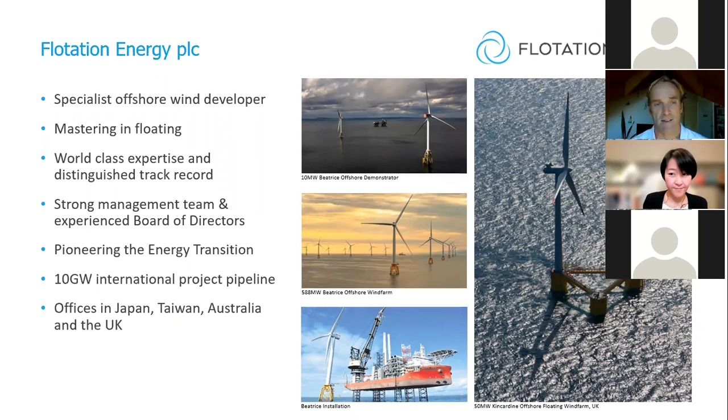Flotation Energy developed the Kincardine offshore floating wind project - or the directors of Flotation Energy did, and the rest of the team were involved in developing that project and getting the consents and bringing it to the construction phase, which is where it is now. That was first started by Allan MacAskill and Nicol Stephen, and they subsequently brought Cobra in as a joint venture partner, who are part of the ACS group, a Spanish engineering, procurement and construction company. Combined, they've now brought that to the construction stage.

The photo you see before you is of one of the 9.5 megawatt floating turbines being towed to the site off Scotland. It's about 15 kilometers offshore in 60 to 80 meters of water. The total capacity of the project is 50 megawatts, which makes it the world's largest floating offshore wind farm and is likely to be the largest grid-connected floating offshore wind farm potentially through 2025-26.

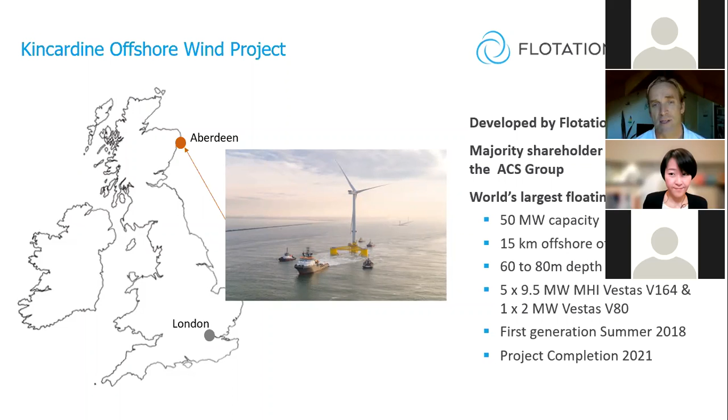There are 5 9.5 megawatt MHI Vestas machines and 1 2 megawatt machine. The 2 megawatt machine was installed in summer 2018 and has been generating since, and is now in port for refurbishment. There are 2 9.5 megawatt floating machines on site at Kincardine now.

The other 3 machines are in assembly and will be installed by June this year when the project is fully complete and operational. That's a hugely exciting project, led by the Flotation Energy team, and represents the culmination of a lot of knowledge around floating offshore wind, giving us lessons learned for the next project, including in Japan. We're keen to bring that experience and our bottom fixed wind experience into Japan and work with our partners there.

Flotation Energy has 3 areas of business: UK leasing rounds, which is round 4 that has just concluded, covering England and Wales bottom fixed offshore wind farms, and ScotWind, which is primarily focused on commercial floating. The second area is oil and gas decarbonisation, the energy transition as we call it, with a number of projects going on in the UK and internationally.

We see an opportunity in Japan for oil and gas businesses wanting to get into offshore wind, working with Flotation to develop those projects, and leveraging all that UK experience and exporting it abroad. So we have a number of international projects in development, which is what I lead, including in Japan, where we now have offices and personnel, Taiwan with Reggie Wu, who I believe is on the call, Australia, where I am based, and in Ireland and Norway as well.

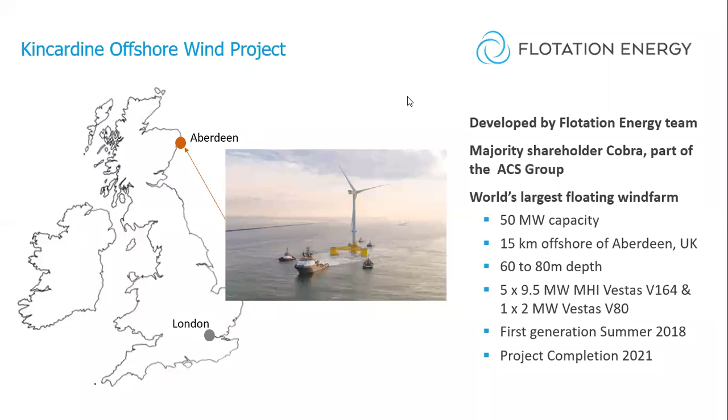Can we just go down 2 slides, please? Thank you. And then you see Total on the other side of the UK and RWE as winners as well. Very exciting project for us to be winning, and combined with Kincardine, it really brings together all the expertise we have in both bottom fixed and floating.

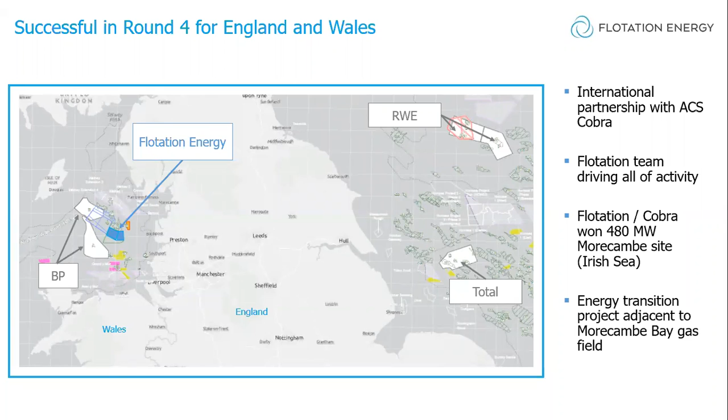So I've given you a sense of what we do. In addition to all of that, we have a major 300 megawatt floating wind project in the UK that we're working with a large international oil and gas company on developing, and I hope to be able to give you some more news on that now.

We have Nobu Suzuki, who represents the company in Japan. We've done a lot of work identifying sites and potential projects. We bring a unique experience and track record from the UK into Japan and throughout Asia. Our business model is very much a collaborative and partnership-based approach. We believe project development is a domestic, local business - you can't do that from outside Japan.

So we're looking for partners to help us develop those projects, those who want to be part of floating offshore wind, and we're ready to receive you, to talk to you. We're active in UK leasing rounds, as I've just outlined - we've been awarded a 480 megawatt offshore wind project in the Irish Sea, and we're bidding on ScotWind, again floating wind projects. We are pioneering the energy transition with the first 300 megawatt floating energy project, which we hope to announce very soon in the North Sea, building on the Kincardine project.

And we're developing projects in Europe, Australia, Taiwan, and indeed Japan. So with a lot of expertise, a lot of knowledge, we're very keen on developing floating offshore wind in Japan earlier, and we believe that's really important. Floating wind is at a relatively early stage. There's maybe 74 megawatts of installed capacity worldwide. Huge potential, gigawatt potential. We believe Japan is really well placed for floating, and we'd like to see projects developing much earlier, so we can bring those forward and provide all those benefits, industrial benefits, jobs to Japan, and indeed to create an export market as well.

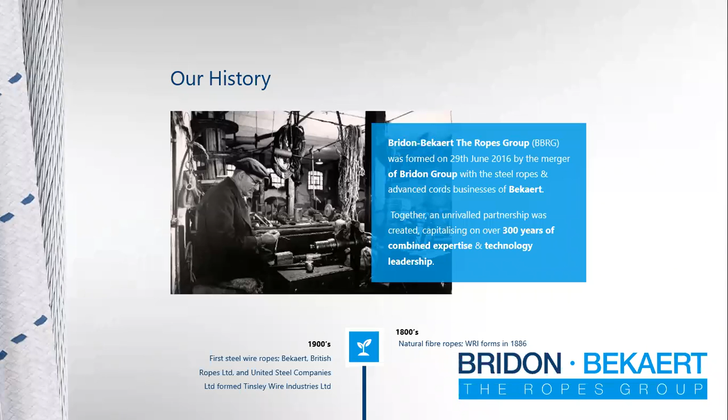BBRG was formed out of a merger in 2016 between the Bridon Group and Bekaert. The Bridon Group being a long-lived British rope company specializing in both steel wire as well as fiber ropes, and the Bekaert Group, which is a Belgian conglomerate of primarily wire products. Both companies began producing in the late 1800s, and we're producing steel wire ropes by the early 1900s. So we've been at this for a while with over 300 years of combined expertise in our respective industries.

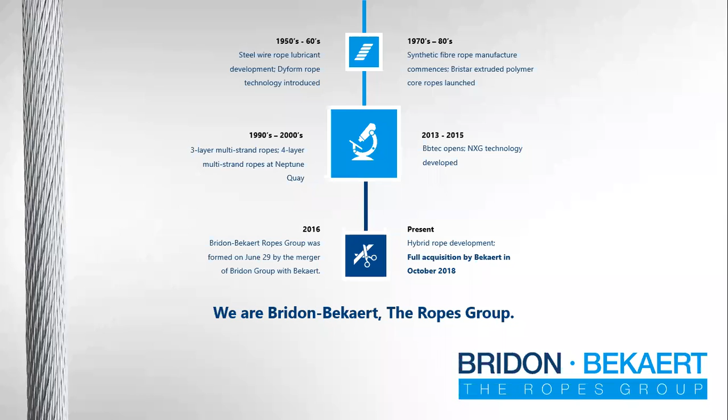As the companies grew, they've both been on the leading edge in terms of product development with a number of innovations such as Dyform steel wire ropes, Bristar wire rope with extruded polymer cores, etc. And this was done by heavy investment in R&D, and for example, in 2013, opening up our Bbtec Center specifically to develop next generation rope technology here in the UK. Currently, as an example of that, we have ongoing developments in hybrid rope technology. So basically taking our two expertises, which is synthetic fiber ropes and steel wire ropes, and trying to create combinations thereof, offering the benefits of both steel and synthetic.

So as part of Bekaert, Bridon is about 10% of the Bekaert Group. The Bekaert Group itself is a very, very well-funded, globally dominant player in the wire business. 5 billion euros in sales, 120 countries we have footprint in with over 30,000 employees. So BBRG is a capable partner, well funded to be able to deliver on large capital projects on time.

We do this through a global presence with offices, with production facilities, and with technical centers spread among all continents with the exception of Africa and Antarctica at this time. So 20 sales offices, 17 production plants, and 4 modern technology centers. So in all key markets of floating wind, whether we're looking at Japan, the UK, Spain, Norway, we have in-house engineering to support your project needs, as well as production capability. And being part of such a large experienced team, we're also ready to be able to establish new production facilities as needed.

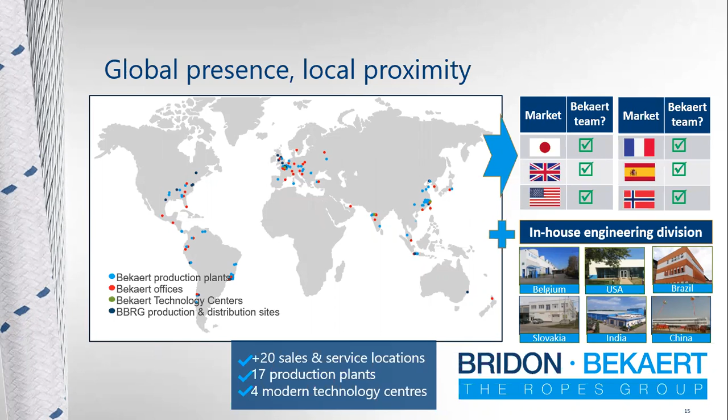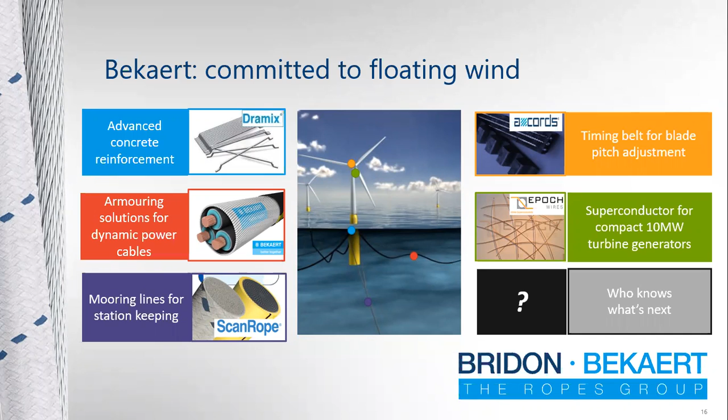Bekaert on a whole is committed to floating wind, not just with regards to mooring lines, which I'll be discussing further, but with regards to a number of other products within our company portfolio. So we have advanced concrete reinforcement with our Dramix product. We have low loss cable armoring from Bekaert Solutions. We produce cords, reinforcing cords for tires and belts, for example, used for adjusting the pitch on rotor blades. And we have a JV with Epoch Wires, developing a superconducting wire.

As I mentioned, this is done through a commitment to innovation. In our multiple R&D centers, we've committed to spending over 65 million euro in-house R&D per annum to be able to stay on the forefront and develop the next generation of products capable of enabling the green energy transition.

Specifically with regards to ropes and cables, we have a center in England called Bbtec, which is one of the most advanced full-scale testing facilities in the world for testing of synthetic fiber ropes, hybrid ropes, and steel wire ropes. We have a range of instruments and test machines specifically targeted at looking at wear modes of ropes in use. We have forensic laboratories to determine cause of failure, and over 25 technologists working specifically in the advancement of rope technology.

With regards to our mooring line production, currently this all takes place in the UK. We have 3 facilities dedicated to mooring line production. 2 of them are fiber rope production facilities, both based in Scotland. One, in Coatbridge near Glasgow, is our flagship facility for fiber rope production.

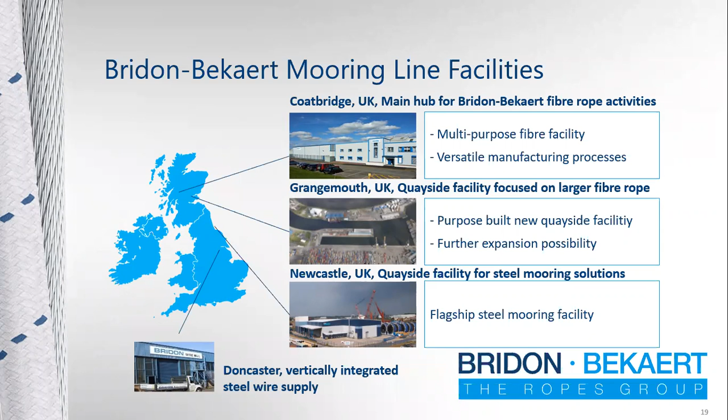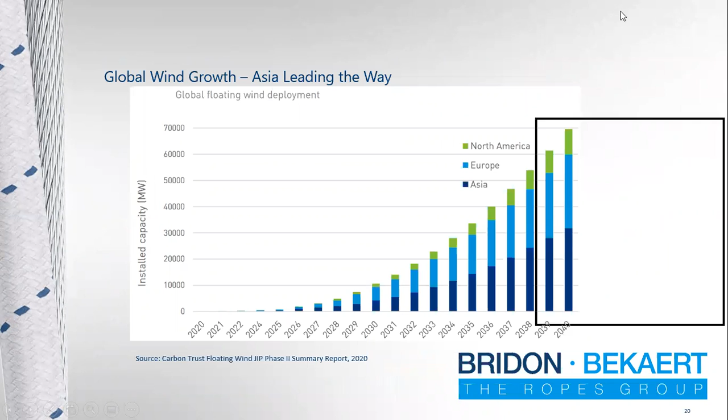So we are well positioned currently to produce mooring lines to meet the needs of the European market, as well as export needs to places like Japan. But as I mentioned earlier, we stand ready to grow and expand our facilities as needed, because the demand is growing in both Europe and Asia, as well as elsewhere in the world, hopefully. The ability for the supply chain to quickly respond to the needs of such large numbers of lines, as required as these farms go commercial, is going to be key to success, we believe.

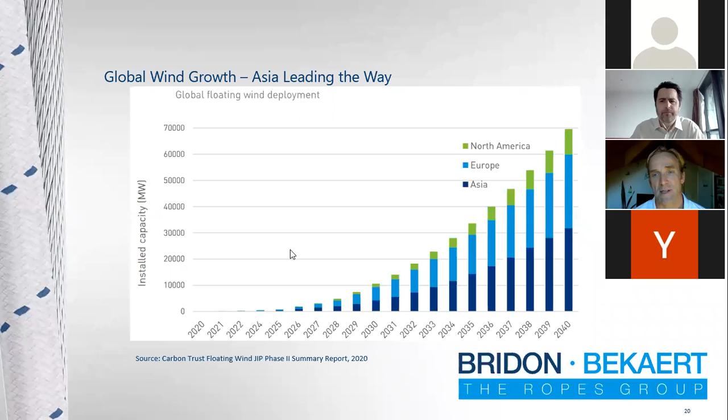In terms of track record, it's difficult to point to a long track record in floating offshore wind because it's rather new. But we can point to an unrivaled track record in deep water oil and gas mooring. If we look at the technological evolution leading towards floating offshore wind, it's natural to look at mooring for oil and gas. BBRG has a very long track record in providing station keeping mooring lines for oil and gas, with over 2,000 kilometers installed to date around the world, of both steel wire and fiber rope solutions.

This comes with a tradition of pushing the envelope with a number of firsts - first synthetic mooring lines, deepest spars moored in the Gulf of Mexico, et cetera. So leading the way in terms of mooring is something we're accustomed to doing, and we anticipate doing the same in floating wind.

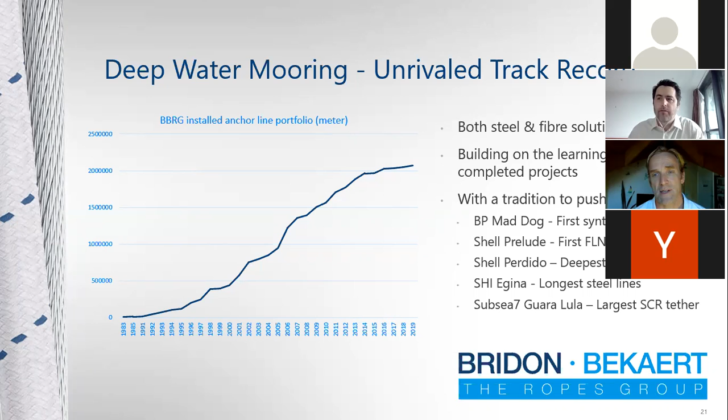And thus we have been active in pushing that envelope in floating wind as well, getting floaters in the water using our mooring lines. We currently have 2 floaters going into the water - one already in the water and one about to go in, utilizing our nylon mooring lines. One of them is the spar going in Goto Bay, Japan, with Toda Corporation. We also supplied steel spiral strand for Hywind Tampen in Norway, and nylon mooring line for the EnerOcean project off Spain.

So we're positioning ourselves well with regards to these demo projects to prove the viability of both synthetic and steel mooring lines, but particularly synthetic mooring lines, and our vision for what those should look like and how they differ from the mooring lines used in deep water oil and gas.

We're also advancing the technology through JIPs. We've been a member of a number of key JIPs responsible for characterizing and proving the validity of these new designs as safe and economical at farm scale.

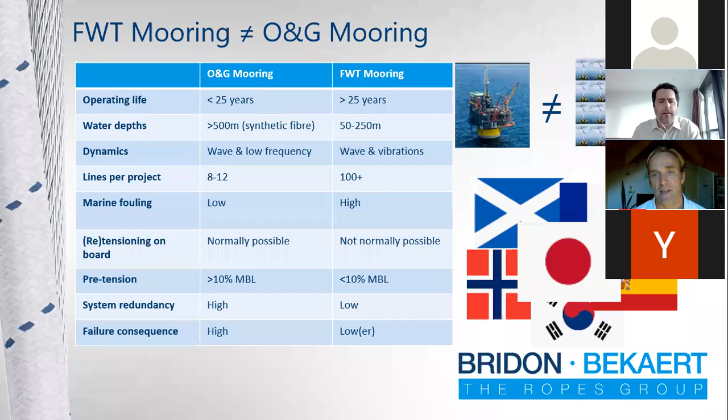In terms of our current offerings of mooring lines, we offer the gamut from steel spiral through polyester, nylon, and high modulus synthetics. Of the products currently being used in mooring, the only thing we do not offer is chain. One important note when we look at ropes is that the material selection available in rope means we have a very wide range of physical properties, which perhaps isn't necessarily appreciated when one is looking at one grade of steel or another.

If we compare across the range, for example in terms of elongation at failure, we have a tenfold difference from the elongation of steel spiral strand or high modulus synthetic all the way out to a nylon rope, where a typical nylon rope might achieve 20% or more elongation, polyester about 10%, and the high modulus synthetics and steels down in the 2 to 3% range. So simply in the amount of elastic compliance one of these lines can put into the system, you have huge leverage in your design just by choice of the correct mooring line. They also have different behaviors in terms of fatigue, strength, density, etc.

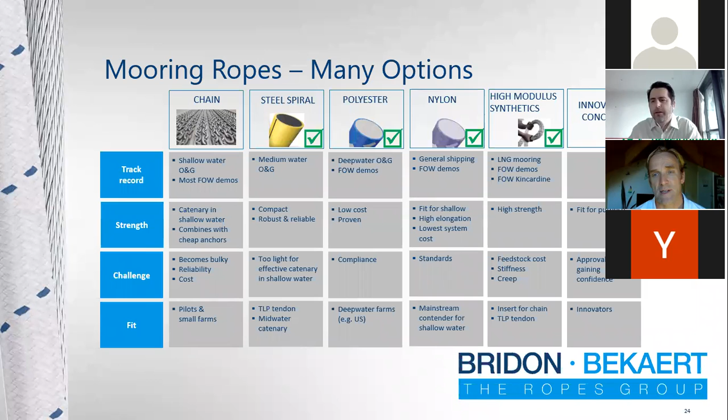Currently, most demo floaters have been using a significant amount of chain, as I mentioned earlier, done primarily for ease of getting a system into the water quickly. When stuck with what was currently available from the world of oil and gas, you had polyester mooring lines designed for deep water, and you had chain. With regards to these shallow waters, the need to have a compliant enough system to reduce dynamic loading drove people towards the use of chain.

However, we just don't see how this is feasible in the long term. There's a significant economic challenge with using moorings consisting of large amounts of chain, due to the increased cost and the increased length required.

If we look at the failure rates over the last 30 years in oil and gas of chain moorings, they have been significant. And with the reduced redundancy that most floating wind platforms are being designed with, a single mooring failure would render that turbine out of service for some period of time until repair could be made at best. At worst, you could have cascading failures, leading to loss of the floater or damage to other floaters. We simply don't see how the reliability of chain going forward, unless major changes are made, is going to improve things.

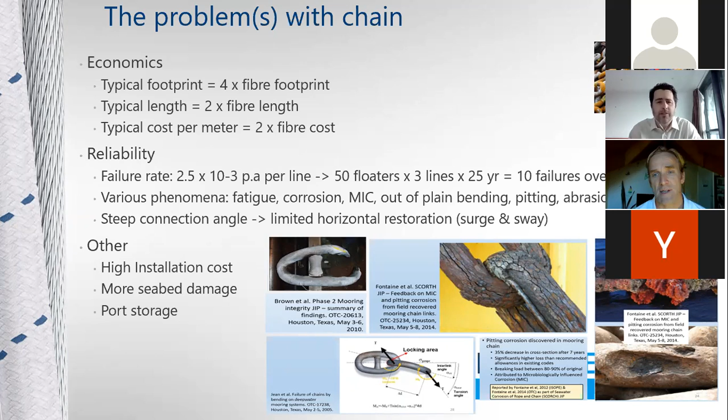Our approach to floating offshore wind mooring with fiber is to take a modular approach. We have a selection of load-bearing cores, establishing the base chassis of what the rope looks like and how it performs. We have materials and designs that can be tailored to match the application, whether it's strength per size, strength per cost, stiffness or compliance, or fatigue life. So how we go about this is we design our core to match the need, then we add enhanced durability features.

We've developed, or are currently developing, next generation eco-friendly marine fouling prevention systems to prevent damage or significant weight increases of mooring lines due to marine growth accumulation. We've developed enhanced cut resistant covers to minimize risk of damage, for example by over-trawling or contact with the seafloor, as well as enhanced protection allowing our mooring lines to go to the seafloor regularly, either during installation, wet storage, or on the lee side of certain mooring designs, where lines can go slack and touch the seafloor. We want to make sure no damage is taking place there.

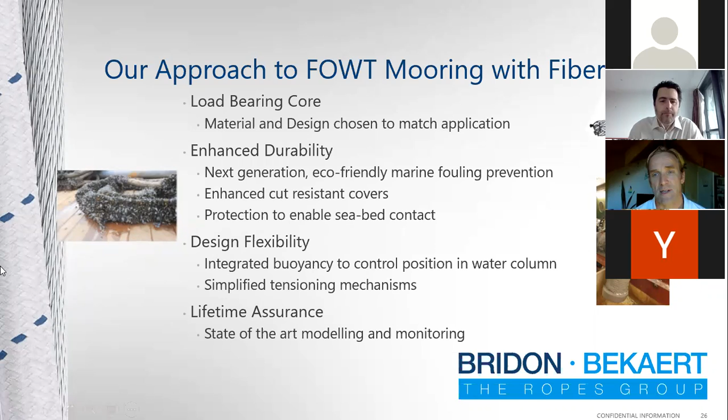So that's it for BBRG. We bring experience and innovation to the world of mooring lines, and we're ready to help you in Japan, in East Asia, develop your farms economically and safely. Thank you very much.

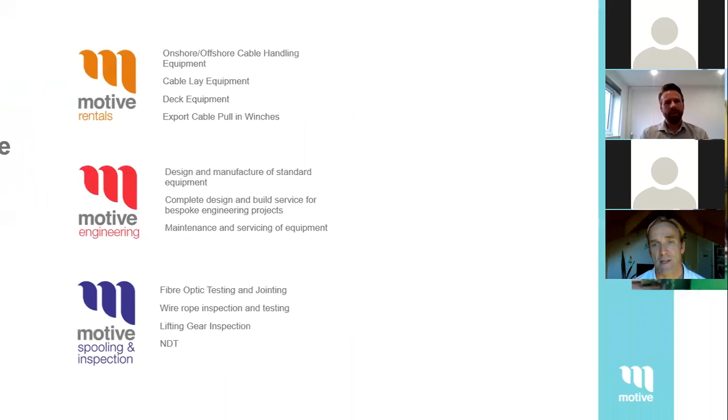Our latest developments around offshore wind and renewables technology: in 2019 we acquired a company called PumpTech. They specialise in cable testing and jointing, and we launched our cable testing division. Last year was a big year for us, with 40% of our offshore activity focused upon renewable energy projects around the world. And late last year, we acquired a company called Flowline Specialists. Flowline have 10 years experience working in renewables, particularly offshore renewables, and they've focused on cable handling equipment and lay equipment.

Next slide, please. So what I'll do is go through 5 major areas where we support offshore wind projects across the world: our cable handling and lay solutions, export cable pull-in spreads, our fibre optic testing and jointing services, vessel inspection services, and finally wire rope management.

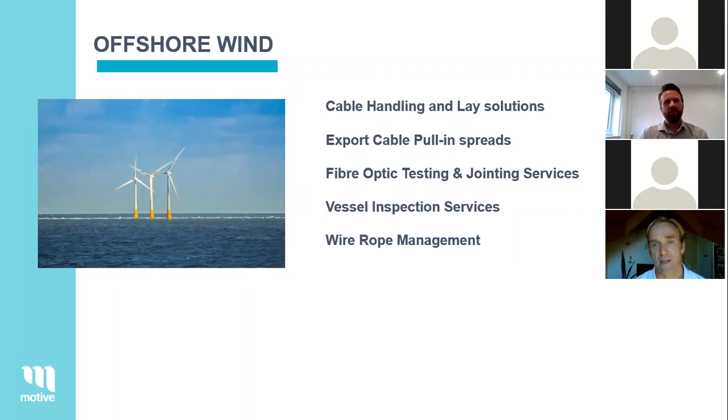Next slide, please. For cable handling and lay solutions, we have equipment such as reel hub drive systems, tensioners, linear and bow cable engines, under rollers, subsea turntables and pallets, and associated ancillary equipment. All of our equipment is operated by our highly skilled operators and supervisors, who travel on a global basis to support our clients within their projects.

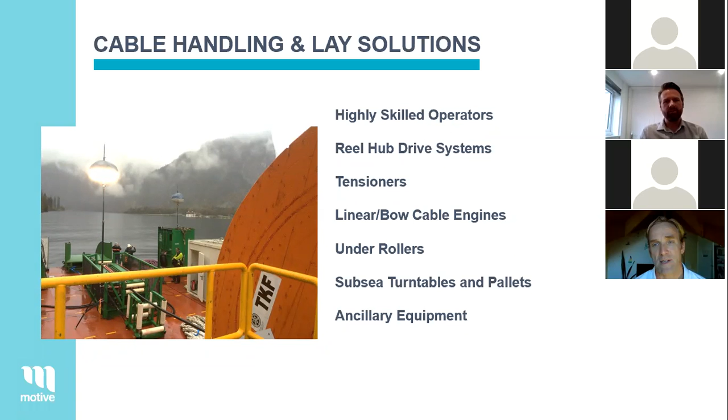Next slide, please. This is a video of a recent cable lay for us, where we've supported our client by handling and laying the cable onto the seabed. If you can press play.

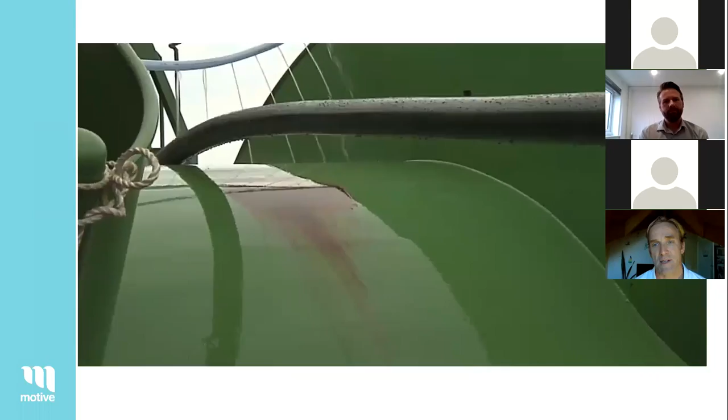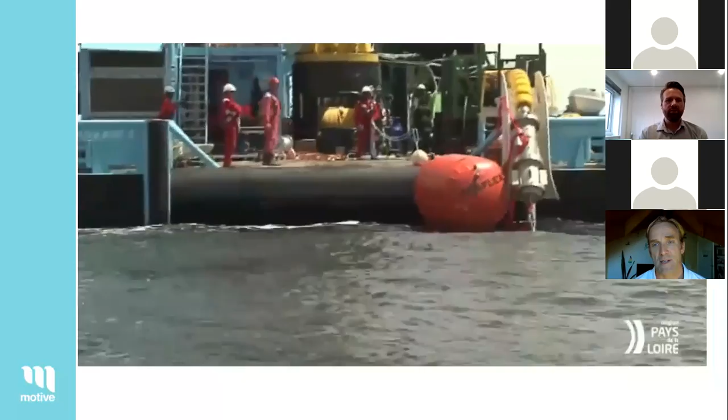So you'll see we have a reel spooler there spooling the cable through one of our tensioners. The cable is overboarded over an overboarding chute, and then it's deployed onto the seabed. You can see the head there going into the water. So we've supported our clients there with the equipment, the supervision, and the operating personnel to complete the project safely and on time and budget.

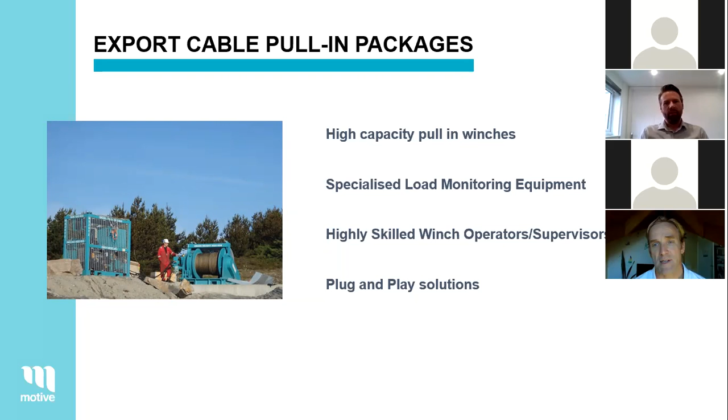Next slide, please. Our export cable pull-in packages consist of high capacity pull-in winches. To make sure the project is carried out safely, we also have specialised load monitoring equipment, which is delivered along with the winches. Our winches are operated by our highly skilled winch operators and supervisor teams. And finally, for the pull-in packages, our equipment is more plug and play, so you don't need a large amount of infrastructure to deploy the winch and carry out the scope. All of the mobilization is carried out by our team, and we handle the entire process.

Next slide. We also have fibre optic testing and jointing. Our teams can conduct OTDR testing, insulation testing, high resolution monitoring, fibre optic slicing, splicing, and jointing services. This means we're able to support our clients from the cable factory, onboard their own vessels. We're able to deploy the cable and test it before we pull it into the beach. So it's a comprehensive solution that we do offer.

Next slide. So we wanted to touch on our offshore wind activity in Asia. We've been supporting offshore wind in Asia for the last 2.5 years. We were proud to be one of the first EPCI support companies in the region, offering full turnkey solutions from the cable factory to the beach. Some of our highlights: we were part of Taiwan's first commercial scale offshore wind project, where we conducted the export cable pull-ins for Formosa 1. We've also been working on the Yunlin project, one of Taiwan's largest offshore wind projects, again supporting with various export cable pull-ins required over the last 12 months.

This year's an exciting year for us. We are working on Changhua, the first phase of a long-term project, and this is more where our integrated services are really supporting our clients. We're able to do the quayside cable transpooling at the cable factory in Korea, handling and spooling the cable onto our clients' vessels. Then we support them with the cable lay, providing the cable lay equipment and personnel. And finally, our guys on the beach operate our winches to do the export cable pull-in. So it's a comprehensive service around the subsea cable that we're able to support our client with.

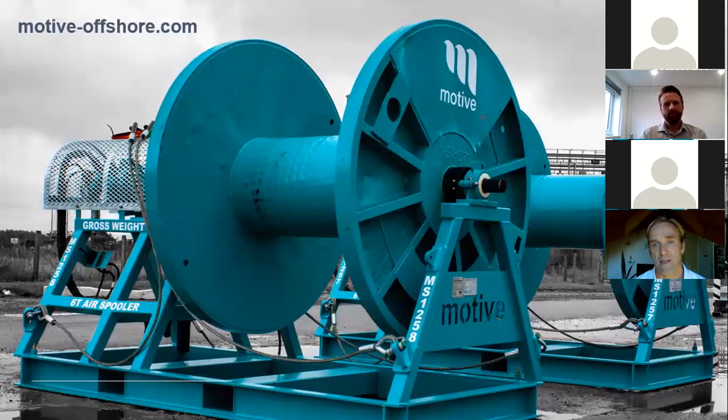So that's our business overall. We're keen to support in any way we can. We are also keen to look at any partnerships with potential partners in Japan. So as Kevin said, the presentations will be submitted to yourselves along with our contact details, and we're happy to help in any way we can. Thank you.

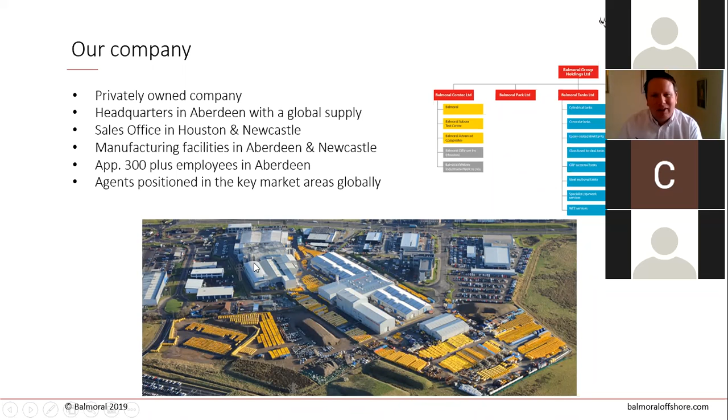So we're headquartered in Aberdeen, and that's where our manufacturing happens. We have sales offices in Houston and also in Newcastle. Within Balmoral, there's about 300 people working for us, focusing in on the offshore exploration and renewable market. And we also have agents positioned globally within the key areas. This is a screenshot of our facility here in Aberdeen, where you can see everything basically. The yellow outline there is our facility in Aberdeen.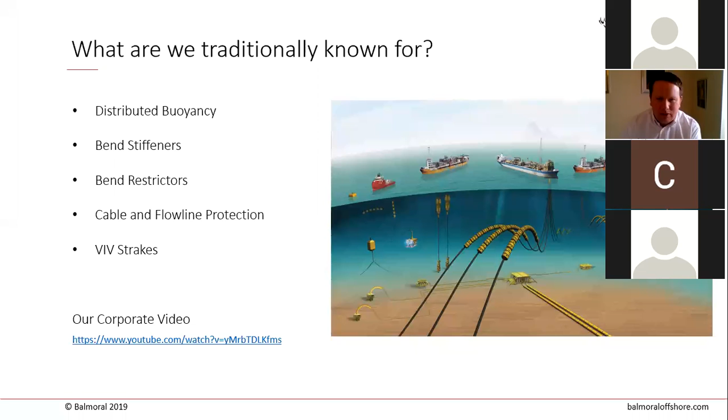So this is what we're doing in renewables now. So you'll see that for fixed offshore wind, we're providing the cable protection systems, taking all our knowledge of polyurethane, taking all our knowledge of subsea environments and the hydrodynamics that come with it, and making these into the products that protect cables for the longevity of a project. They can be used in monopiles, or they can be used on jackets with a J-tube setup. And if you look at the floating turbine here, a lot of the subsea construction work is very similar to what we've seen typically with FPSOs in the oil and gas market.

So that knowledge, as I said earlier, we're transferring through into the renewable market. A lot of patented technologies really aid with installation with a total cost of ownership. We look at the added value and how we can make the systems be installed for the duration, and look at how we can get them installed efficiently and safely. You'll see the buoyancy modules, tether systems, and crossover protection there as well. So existing infrastructure that may be in place, whether pipelines, cables, or umbilicals, we also have solutions to make sure they're not breached or interfered with in any way during installations.

So a wee summary there: you see that for fixed and floating offshore wind. The cable protection systems, monopile and J-tube configurations, the bell mouth and ancillary items, distributed buoyancy modules, dynamic bend stiffeners, hold back tether systems, touchdown protection, and marine mooring buoys. So we've got a really significant part to play, whether it's fixed or floating.

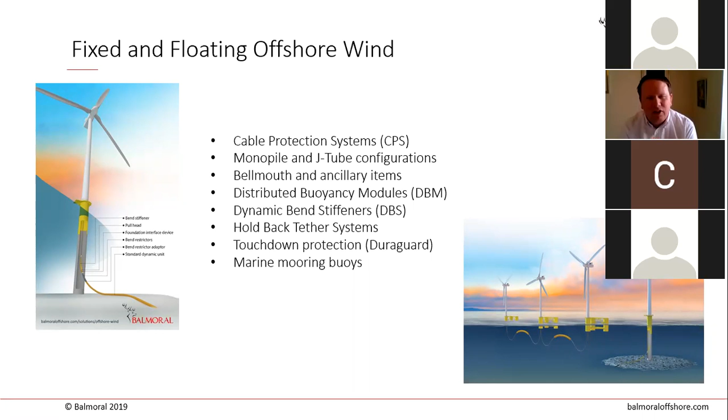A couple more details on our cable protection system for fixed wind, named the Balmoral FibreFlex. It's a patented system, very uniquely constructed using woven fibers, which gives a great improvement in axial tension and will also control the axial elongation.

Going back to our dynamic expertise, fixed offshore wind cables are in dynamic environments. From the burial point into the monopile or J-tube, that cable is really, really exposed to the elements. And as Greg also mentioned from Bridon, shallower water has its own challenges, and the sea conditions will really move the cable, twist the cable in all sorts of ways. This technology will protect that for the duration of the project.

There's a very thin layer of polyurethane surrounding the FibreFlex, which gives a very good thermal performance. If your cable was in a fully enclosed polyurethane system, there's a fair chance the polyurethane is going to act like an oven - the cable's going to heat up, and the heat's got nowhere to go, so there's a risk of baking the cable. Due to this very thin layer of polyurethane, it actually gives very good thermal properties and performance throughout the lifeline of the project.

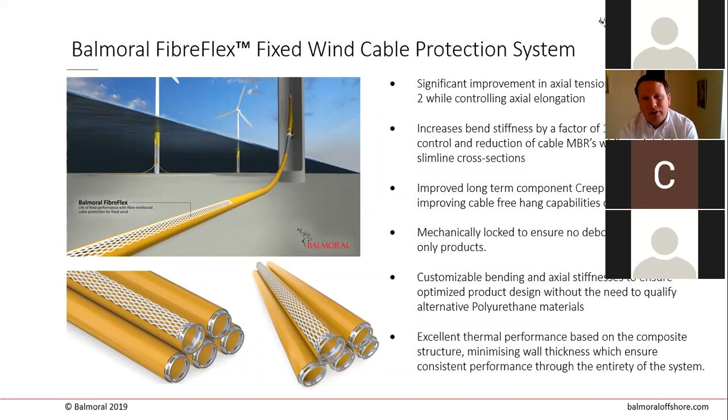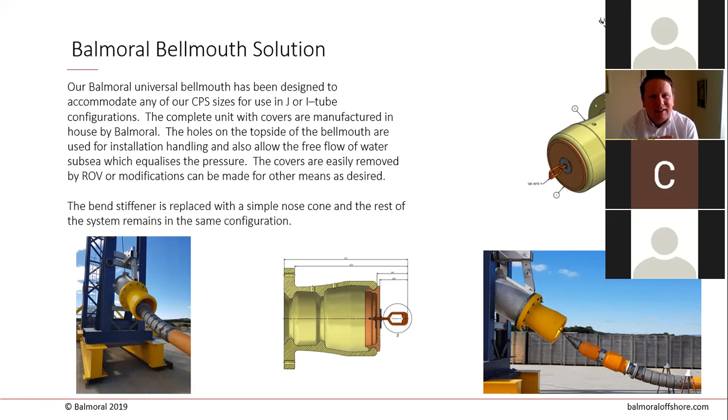For the jacket installations, we have the Balmoral Bellmouth - a unique universal system we've created. They'll have varying cable sizes, whether for the export line or multiple different cable types within the offshore field, resulting in different cable protection sizes. This bell mouth accommodates any of the sizes whatsoever, so one unit can be used for the export line and for the inter-array cables off of the one system. That really aids with the installation, reduces the risk of poor coordination, and is typically installed on the quay side on the jackets and then put offshore during the installation.

A couple of points on the distributed buoyancy. Speaking about the floating wind market, it's one that Balmoral is very, very active in and is definitely much a target for us. Deep water for us is 5,000-6,000 meters, and deep water for floating wind is maybe 500 or 600 meters, but that still comes with its own challenges.

But the technology and patents that we have really aid with installation, ensuring that the best possible solution can be handled on the vessel, can be installed easily, and is going to remain subsea. Right now, Balmoral has over 40,000 modules under the water around the globe, and they're all still there. That's not by luck, that's by engineering and technical excellence. Certification by API 17L - we actually sit on the board and chair the API 17L meetings, so we have a great understanding of the certifications on that subsea product specialist group.

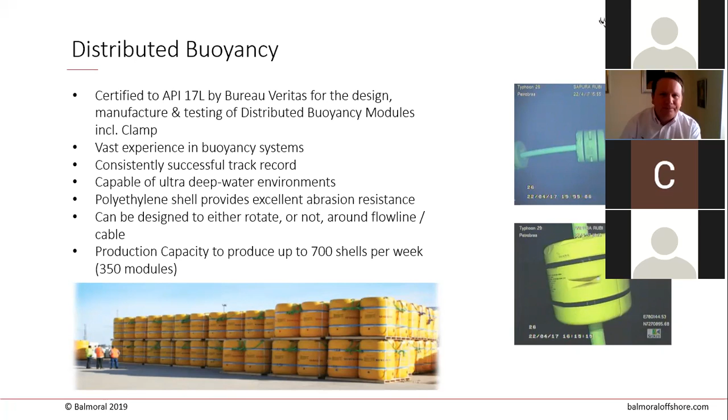Our Balmoral bend restrictors, another core product to us, made out of polyurethane. We have our own laboratory, so we're constantly looking at material, constantly evolving, ensuring that the systems are going to be fit for purpose. We have taken this technology and typically see that applied in, for example, crossover protection.

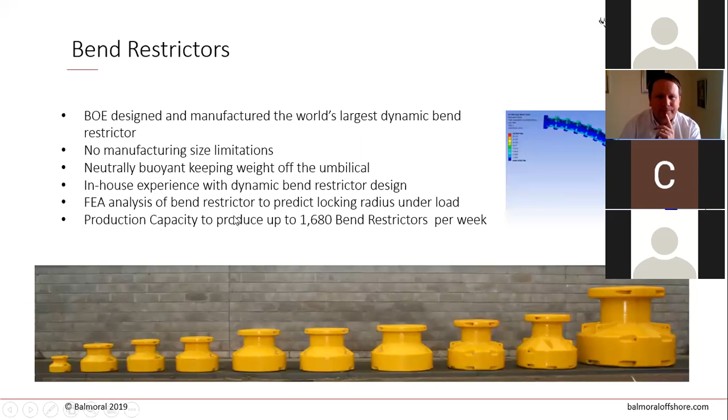Standard marine and subsea products. So whether it's ROV buoyancy, pennant wire mooring, or standard floats required for when uplift is needed, Balmoral have a suite of products and 40 years of experience supporting them.

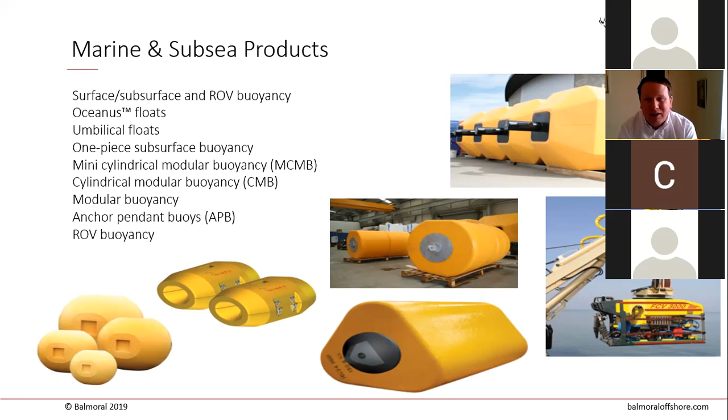Our bend stiffeners range from a meter to 14 meters. Every Balmoral monopile cable protection system has a bend stiffener internal there. And when it comes to floating wind, with the subsea construction being very similar to that of an FPSO, we have the bend stiffener where the inter-array cables connect to each turbine. That's all taken in-house, utilizing polyurethane and the latest technology and materials.

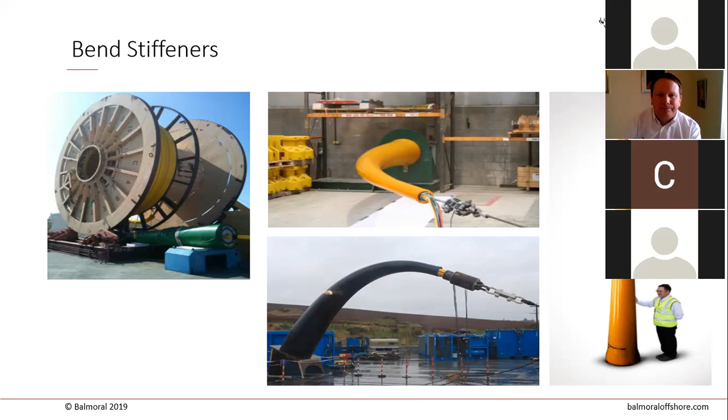Impact and abrasion protection for the touchdown systems there. You see the standard DuraGuard product of the Balmoral system, which can provide standard cable protection on the seabed from shore to the structure.

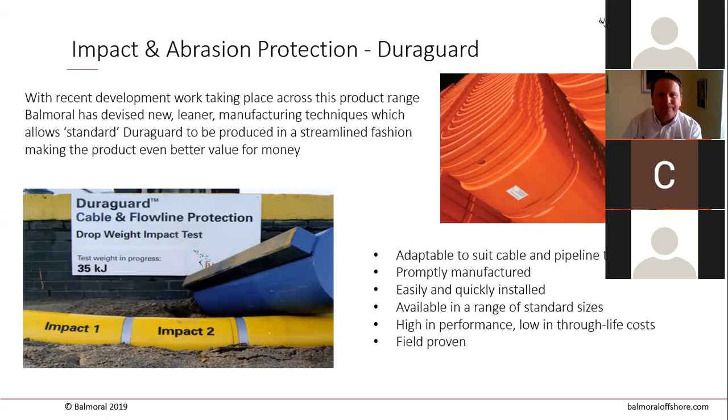A big part of what is at Balmoral's core is our engineering. I touched on it earlier. It's something we really get involved with, and we go shoulder to shoulder on the journey, with that added value engineering and total cost of ownership piece.

We'll take all the soil data, the met ocean data, the geotechnical information, and run hydrodynamic analysis. We'll model the 1 in 100-year storms, ensuring the CPS remains and performs. We won't breach MBR, we won't breach any of the fatigue properties within the cable, and our system will be suited for that.

We'll also look at how we can make the system more cost effective, working with yourselves, the installation contractor, and the developers. Can you bury closer? Can you put the scour protection after the cable has been installed? Things like that can reduce the system length and the overall cost. Given that we also have our own research and development team, we do a lot of design engineering. It's not often we say we can't do it - we can do anything you want at Balmoral.

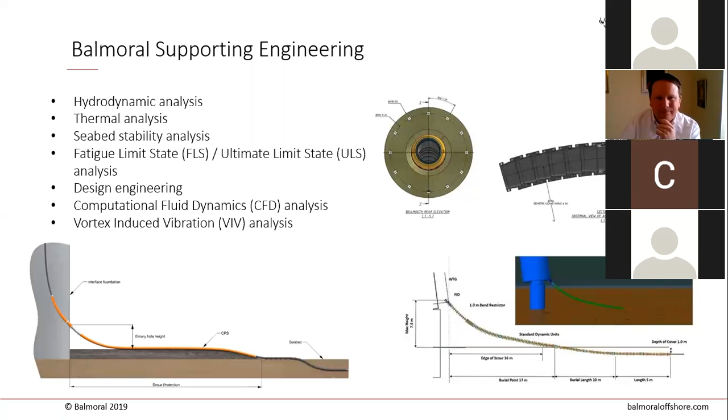We have our Balmoral testing facility. This is a new testing tower that was installed about 18 months ago, and this was taken on the one sunny day in Aberdeen last year. That's for doing full scale pull-in testing, where we replicate how the system will pull the string together, as close to offshore conditions as you can get in a dry land environment.

It's a 20-meter tower. We can vary the entry heights to literally replicate the monopile positioning of the apertures, or we can install, as you'll see in the middle picture, a J-tube configuration with our Balmoral bellmouth, then pull it all together. All data is captured and logged. What's very good about this is the added training - offshore personnel from the installation contractors get to physically put hands on the system and work together pulling it in.

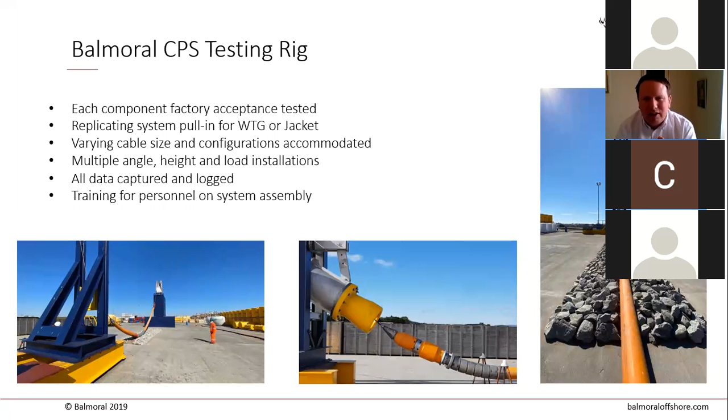Touching on the laboratory, that forms part of our subsea test center. We have the largest privately owned subsea test center in Europe, so we do full hydrostatic pressure testing. We've got 23 different vessels in total, so we can do full scale pressure testing for buoyancy or all different types of materials.

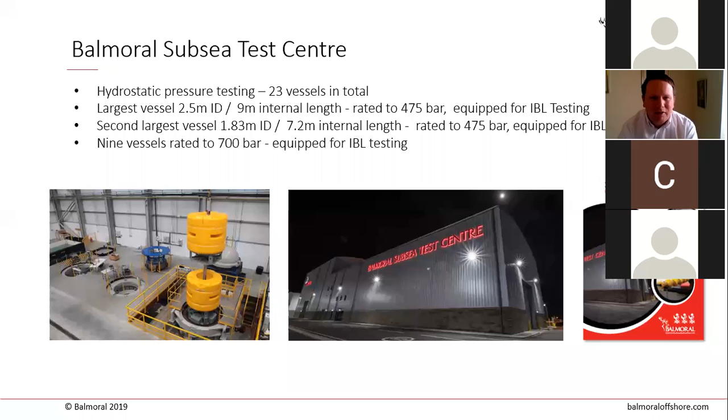We're very big on ensuring the technicalities and longevity of the project - nothing leaves Balmoral without being signed off. We really take that as a core of our business, ensuring the products are fit for purpose and can be there until the end of the project.

We recently completed a program through the Offshore Renewable Energy Catapult - the ORE Catapult, a government-led organization within the UK to help with the energy transition, helping companies typically seen in one sector move into the offshore renewable market. They've created this Fit for Offshore Renewable campaign, about a year's worth of solid work focused on business improvement and understanding of the market and the risks.

We recently completed that and got our certification with granted status. There's quite a big steering group, like Vattenfall, involved at the steering group level. So it's a very good opportunity for Balmoral to demonstrate that our existing processes and procedures are really aligned, and with small changes we've made, we can be fully recognised not as a renewable company or an oil and gas company, but as an offshore energy company.

Thank you for your attention, that's it from me, my contact details are there. The Japanese market is one very important to us, and we'll be very much looking forward to further dialogue when the opportunity arises. Thank you.